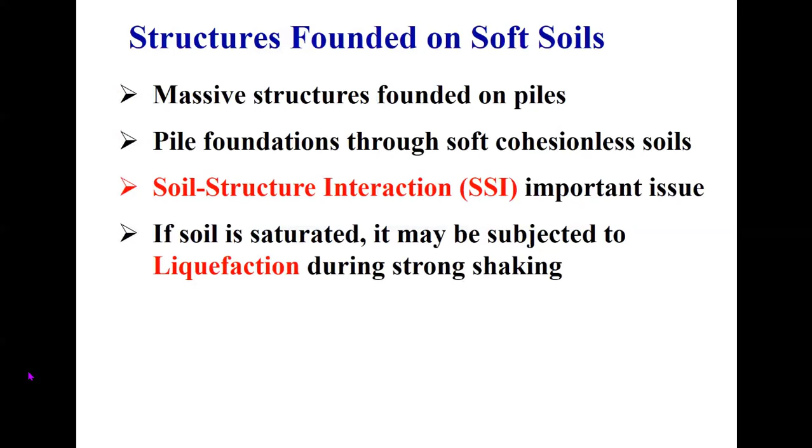So you may be already aware what is SSI, but it is most important when you deal with massive structures which are founded on piles. Pile foundation through soft cohesionless soils, when it is passing through that, when you have cohesionless soils, particularly sand, loose sand, then the chances of liquefaction are there. So in that case, we will be touching upon how to deal with the case when it is liquefiable soils.

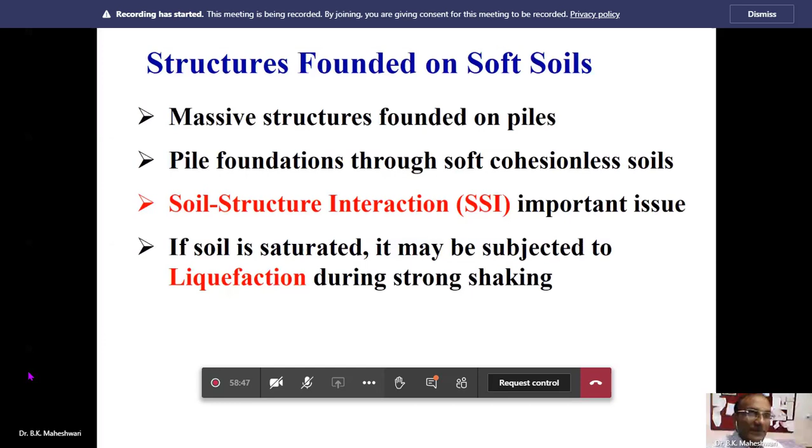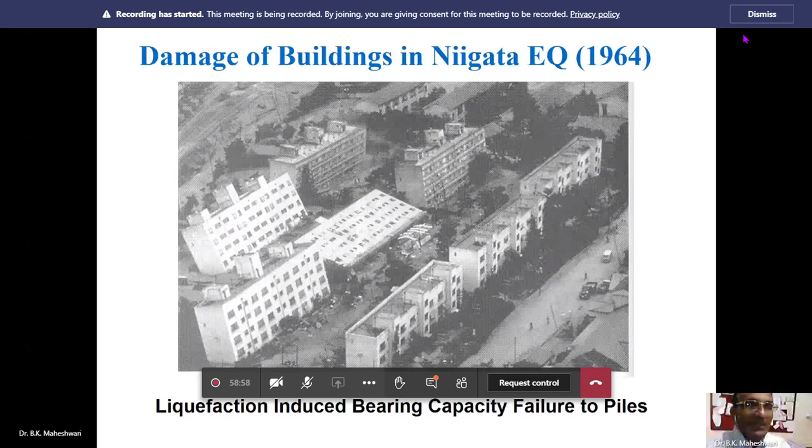SSI is an important issue. If soil is saturated, it may be subjected to liquefaction during strong shaking. There are a few slides which I have already shown to my MTech students, so they should keep some patience until I come to the next point. Last week I covered this in my MTech class also. So what are the failures during earthquakes?

Particularly, this slide is very famous. This is from the Niigata earthquake of 1964, and this is liquefaction-induced bearing capacity failure of piles. So pile foundation is very important for the earthquake condition.

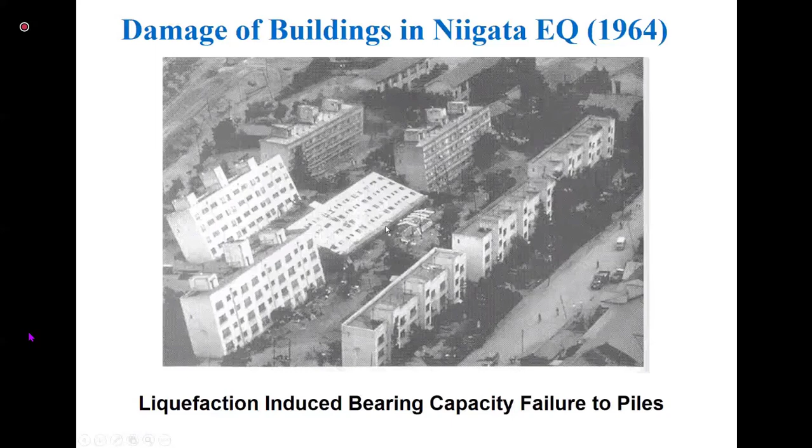Continuing with this, there are other examples of bridges that collapsed during past earthquakes. For example, this is the 1995 Kobe earthquake, and this damage is from the 1964 Niigata earthquake. You could see that the deck of the bridge has been damaged, and this is basically related to what we call foundation failure. Once the foundation fails, the superstructure is not going to survive, so it is equally important that we keep the foundation intact during earthquakes.

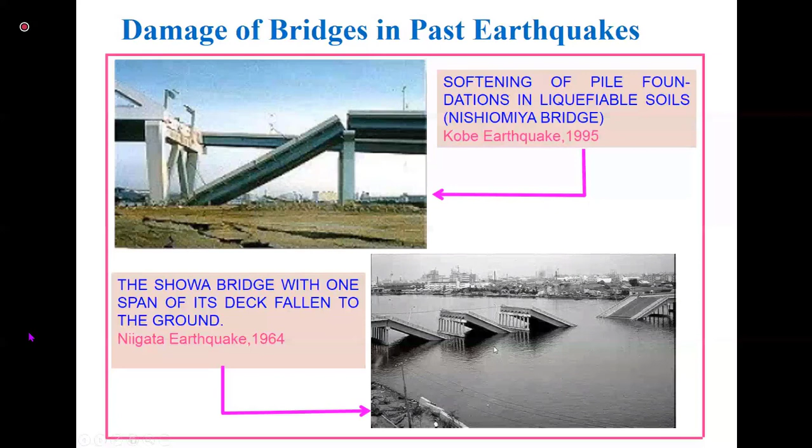Continuing with this, this is again from Japan, the 1995 Kobe earthquake. There was damage to the Hanshin Expressway. What you could see is damage to the piers - these piers got damaged, but there was hardly any damage to the superstructure. If you look at the next figure, you could also clearly see similar kind of damage. So these are all issues related to foundation.

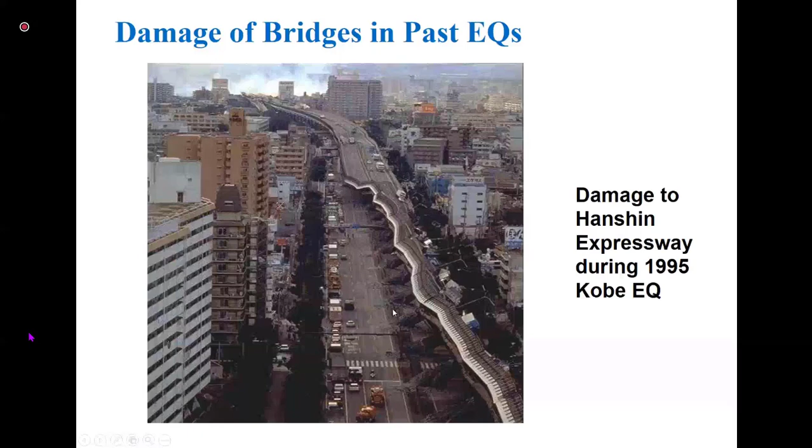These are related to either soil amplification, which is one of the first steps of SSI, or maybe liquefaction. This is another example from the 1995 Kobe earthquake, where you can see damage to piers and the reinforcement is visible. Such kind of damage clearly indicates that the foundation is very important during earthquakes.

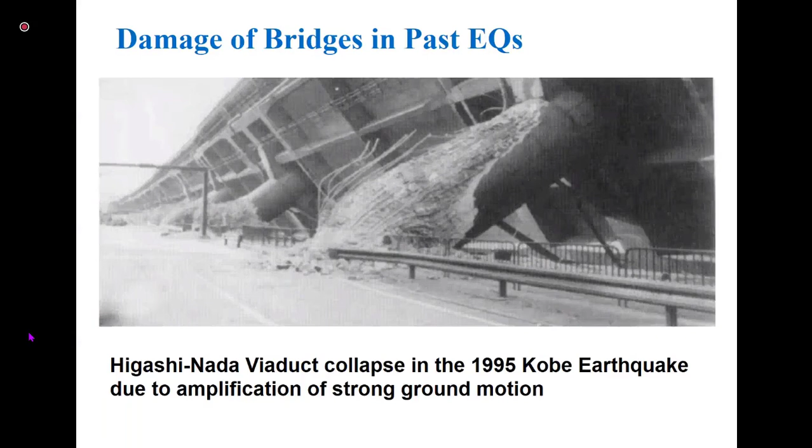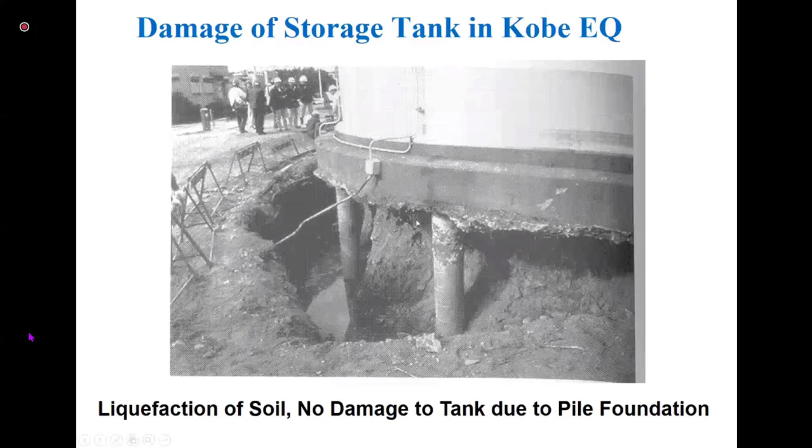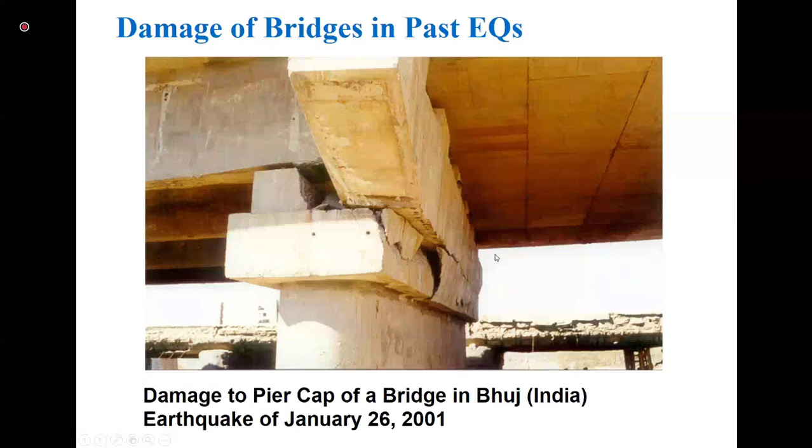Continuing with this, you have damage to a bridge in past earthquakes related to this earthquake. What you could see is that below this deck, the pier cap has got damaged, and below there is some damage to the pier. These are all related to soil amplification, which is the first step of SSI, and will be discussed later. So they clearly indicate that in past earthquakes there is clear evidence of damage related to SSI.

Excuse me, sir. Yes, please go ahead. Sorry to interrupt you, sir.

I'll speak slowly. So what you could have in this case is a pile foundation, which is passing through the liquefiable zone. There are three layers - two layers are non-liquefiable zones, and there is a layer called the liquefied zone in between. The problem occurs at the junction of the non-liquefied and liquefiable zones - these piles will be subjected to severe stress at the junction of the liquefiable and non-liquefiable zones.

To overcome this problem, when we design the pile foundation, we need to account for this liquefiable zone. This can be accounted for by assuming that there is no support from the soil in this zone when we design the piles - assuming that the pile is free, it should be designed that way. Such kind of issues arise, and we are going to discuss them in detail in the later slides.

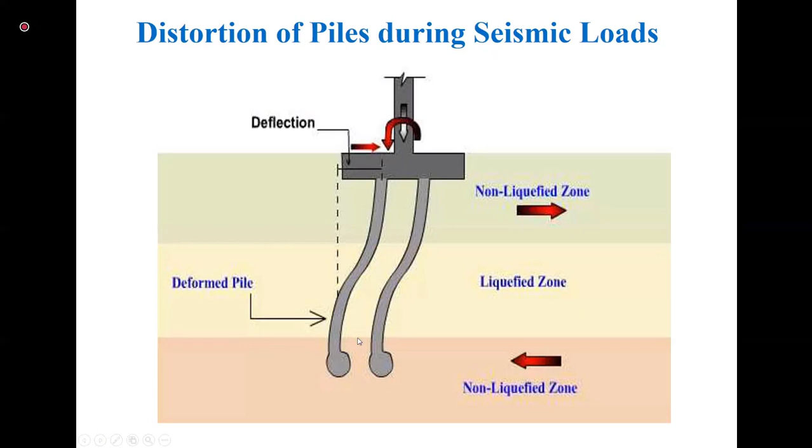So now coming back, after showing you so many slides related to damage and other things, before I talk about advances in SSI, I would briefly like to touch upon the basics of SSI, which has also been covered last week during my class for MTech students - it will be a review for them.

So the most important issue is SSI, which I'm going to explain in the next 2-3 minutes, that is the objective of SSI and why SSI is important.

Okay, thank you. Objective of SSI. So before that, let's see what are the major issues in SSI, and then we'll come to this. There are 4 major issues in SSI which need to be taken care of.

So the first thing is modeling of unbounded domain. Soil, Mother Earth, is infinite, and we need to model the unbounded domain in such a way that we are able to satisfy the radiation conditions. Satisfying the radiation conditions, we need to model the unbounded domain, and this is the most fundamental objective of SSI.

Modeling of soil should be done because the properties of the soil are frequency dependent. That is the difference between soil and other materials. And when we talk about soil-structure interaction, you need to consider the soil fully.

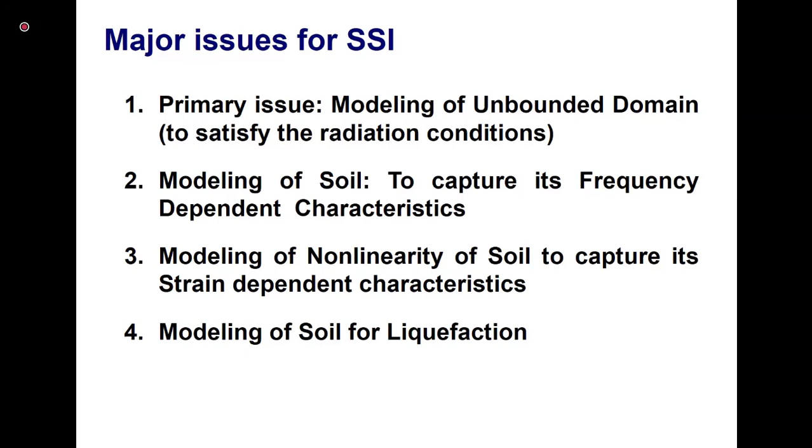It will be a very complex problem, and I will confuse you how to deal with it. But we will discuss the first one. Let's continue with this slide, which will explain it to you.

I think this is my pet slide. I have used it in many lectures on SSI. So those who have already seen it, pardon me. But this is the fundamental slide which perhaps I cannot skip.

So to explain the concept of SSI, what you have is a structure, and when we say structure, the foundation is also part of the structure here, because for the foundation all the dimensions are known, material properties are known. So you assume that the structure includes its foundation, and when this structure is subject to seismic loading, which may be due to earthquake or other reasons, it gets vibrated.

In reality, boundaries and artificial boundaries were not there. In fact, we are putting them to analyze the real scenario. Rather, you have Mother Earth.

Naturally, for any— yes, please. Sir, your voice is barely audible. Oh sorry, then I don't know, is it a network issue at my end? Now your end? Sir, it's clear, but you have to keep your microphone really close. Now it's perfectly audible and loud, sir. All right, and I'll speak a little slowly also, so you can understand it. All right, sorry about that.

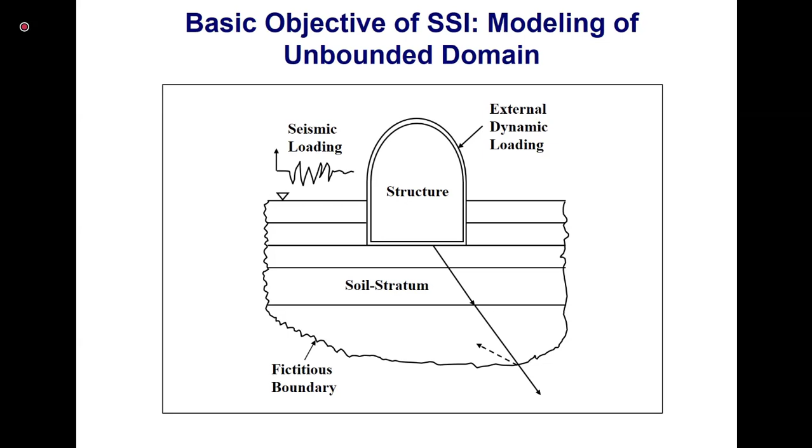So the fundamental objective of SSI is to model this unbounded domain in such a way that it satisfies the radiation condition. With this message, let's go ahead. Now this slide shows the importance of SSI, why SSI is important.

You can see in this slide there are two identical structures: one situated on rock and another on soil. When you have the first one situated on the rock, the arrows show vertically propagating shear waves, propagating vertically while the particle motion is horizontal, perpendicular to the direction of propagation. So when these waves come to the rock, whatever is coming from the seismograph or the bedrock, you can input exactly the same at the base of the structure.

However, when there is a soil column in between the bedrock... yes sir, yeah hello, yeah go ahead please. Yeah, am I audible?

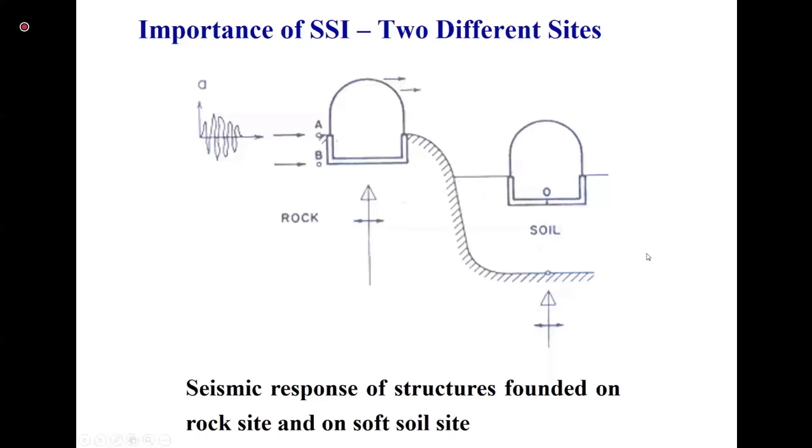Now continue with how SSI works and what are the two other effects which can be explained from this slide. Normally, earthquake motion—because we are talking about earthquake—your seismologist or seismograph gives you the motion at the bedrock level, since most of the time the seismograph is placed at the bedrock level, shown in figure B. In this figure you have incoming waves, and this is the input motion amplitude. This is the case when there is no soil column on top, the soil is absent. However, when soil is present on top of the bedrock, with no structure or foundation present, the presence of the soil still changes the incoming motion.

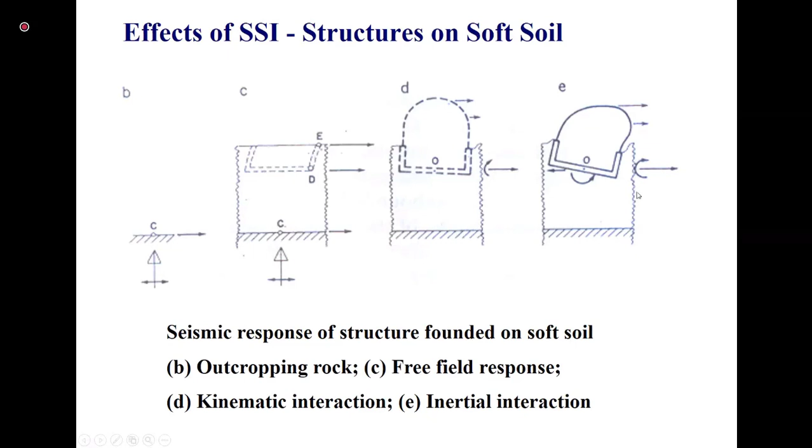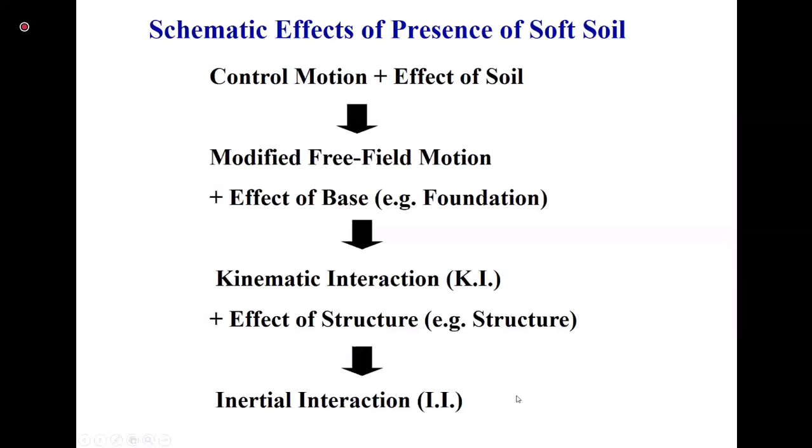What I have discussed in this slide is summarized next: the effect of presence of soft soil can be summarized like this. You have control motion, which is your input motion, and the effect of soil leads to what is called modified free field motion. The effect of the base, that is the foundation, leads to kinematic interaction, and the effect of the structure, that is inertia, leads to inertial interaction. So it consists of three components: free field motion, kinematic interaction, and inertial interaction.

Continuing with this next slide, I hope everything is fine. Yes sir, everything is fine. All right, okay, thank you.

What happens when you consider SSI in the analysis? Most of the time, the time period of the system gets increased, simply due to the flexibility of the soil. When you say you are not considering SSI, you are not considering the soil, but when you consider SSI, you consider all the properties of the soil. SSI is very important when dealing with soft soil or loose sand, soft clay. Since the soil is flexible compared to the structure, as a result its natural frequency will decrease.

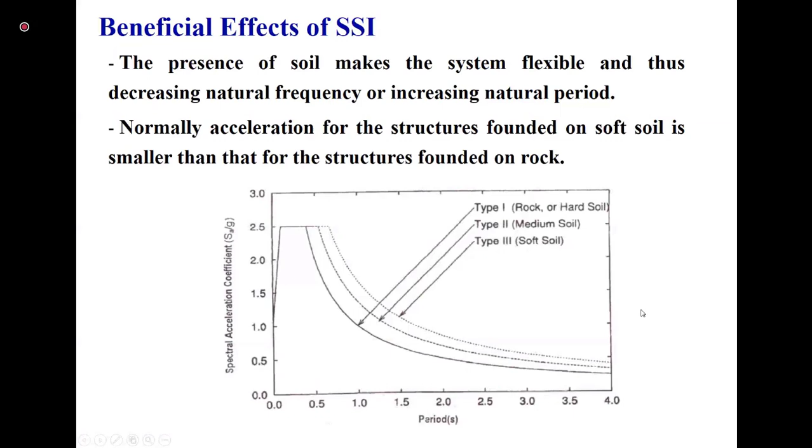Continuing with this, it has already been well documented in research papers. In general, SSI leads to smaller acceleration and stresses, and thereby smaller forces in the structure. But here you need to use the word 'in general,' not always. This is the general case, normally.

However, there are numerous documented case histories where the perceived beneficial effect of SSI has led to oversimplification in the design, leading to unsafe design in foundation and superstructure. There is a paper by Mylonakis and Gazetas in 2000, published in ASCE.

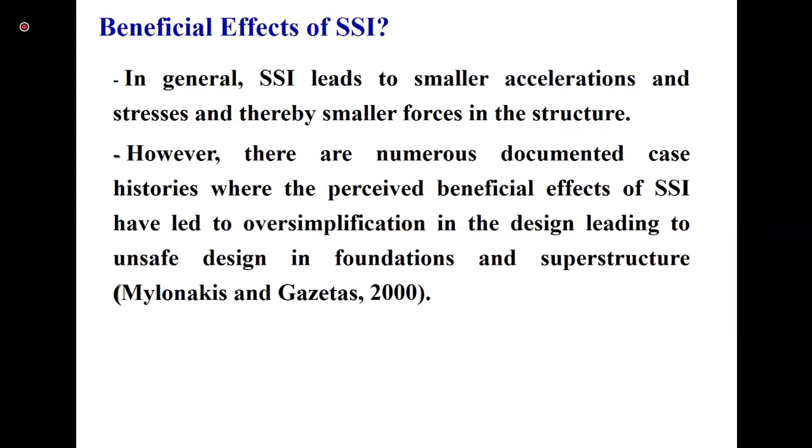Continuing with this, what I am going to explain in the next slides is a very simple method of analysis of SSI, how SSI can be considered in the analysis using a closed form solution, in simple terms rather than a very complicated case.

Before that, let me talk about the three different methods of dealing with or methods of analysis when you consider SSI in the problems. One is called continuous models based on the theory of elasticity. Then you have discrete models with lumped masses, and finally you have finite element techniques.

The first one, based on continuity and the theory of elasticity, takes into account the radiation damping of the soil, so radiation damping can be accounted for easily, and the inertial effect of the soil is also well represented. These are the advantages of the first one. However, you may not be able to consider the nonlinearity of the soil in this approach, so that is its limitation.

The second approach, based on discrete models with lumped masses, where one normally considers springs and dashpots, lets you consider the nonlinearity of the soil. However, it is difficult to consider the radiation damping and inertial effects. So the limitation of the first one is the advantage of the second, and the limitation of the second is the advantage of the first. So first and second are not complete on their own.

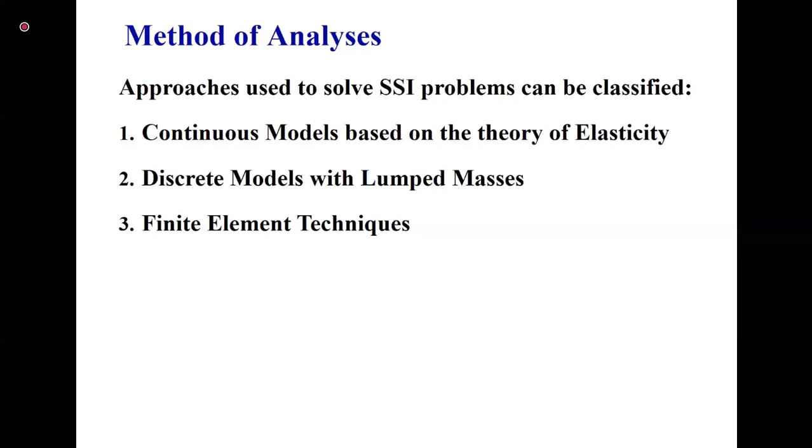So it is simple. What you have in this slide are the general steps for linear SSI analysis. Before that, let me show the next slide, and I hope the slides are visible to all of you, as well as my voice.

Yes, sir. Yes, okay, sir. Thank you. Thank you for confirming.

Thank you. So what you could see in this figure, let me acknowledge that this is from one of the papers, which is not my paper. It is from Gazetas's paper, which you will find referenced here. So this is what you have in the slide.

You have the whole system, which consists of a soil-pile system. Your foundation consists of pile foundation, and the pile foundation goes up to the bedrock - what we call end bearing piles. Then you have the pile cap, this is the pier, maybe of a bridge, and this is the lumped mass representing your structure.

When we deal with SSI, it is the soil which is more important than the structure, because for the structure you can do anything you want - nonlinear analysis, packages are available, you can go into as much detail as possible. But it is the soil which causes a lot of problems in SSI. So my focus during this lecture will be on the soil part, and the structure one can easily deal with - that is not an issue.

So in this complete problem, the seismic waves or earthquake waves are coming from some source, hitting the base at the bedrock level, and ultimately they pass through the soil and the foundation to reach the top here. So now the issue is: how to analyze this problem considering SSI in the analysis?

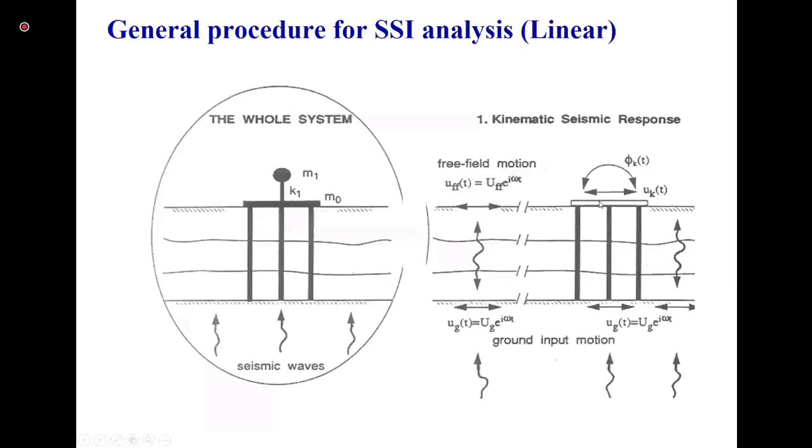Let me emphasize that your input motion is also changing. The input given at the base of this spring is not the same as at the bedrock level - this is quite different. This is the input motion found at the top of the pile cap, not at the bedrock level. In one step you find this input motion, in the second step you find the impedances, and in the third step you combine these two and do the analysis.

Now the analysis can be done in the similar fashion as we do for any type of structural analysis. Let me complete this slide and then we can talk about this. So what we discussed in the last slide can also be represented mathematically in this form, for example dynamic impedances.

In the second figure, there is a term called dynamic impedance. Dynamic impedance is the complex dynamic stiffness of the system.

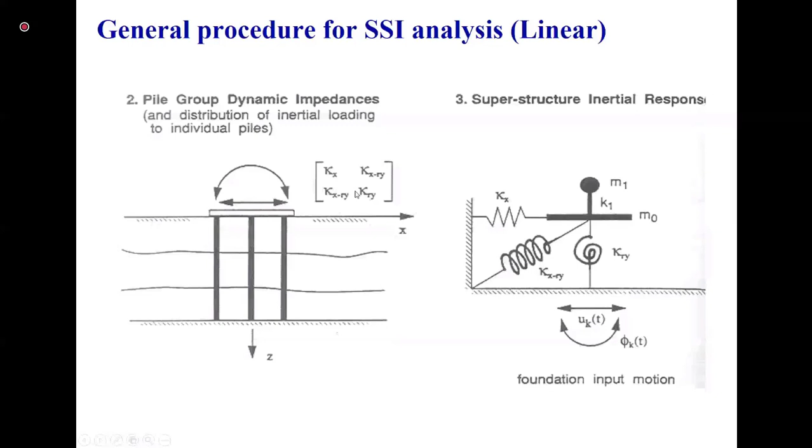Question sir, who is speaking? This is Sukumar sir. So that mass matrix, what does it include - is it mass of the pile cap and pile itself? Kumar, can we talk in the class? I think you can ask in class, no? No sir, I am not your student, I am some other one. Okay, KS Kumar is another person. Okay, go ahead please, speak.

So I have a doubt in this mass matrix and damping matrix. This mass matrix includes which component in your system?

I don't know whether I can write. Can I open a blank slide, or can I write on the blank space if organizers can help me? There is an equation of motion I can write. Can I use some pen or something here on the screen? Yeah, there is something, I could find a pen. All right, so I could find some pen and will try to write something to explain you. I don't know whether I will be able to type it. Pointer option, highlighter, laser pointer - pen is there, but whether it will allow me to write or not, I'm not sure.

Let me explain in the course - that's called equation of motion. I don't know whether you are aware about that. In dynamics, in earthquake engineering, equation of motion is very important, and that equation of motion is: m x double dot plus c x dot plus k x equal to dynamic force. So those who are working in dynamics, they may be aware about that.

And there are 3 types of forces in the equation of motion. One, you have the stiffness force, which will always be there - k multiplied by x will always be there. But you have the inertial force that will come when you have harmonic excitation, and then you differentiate, then you will get omega square. Let's say you have x equal to x naught sine omega t. Differentiate 2 times, then you get omega square, and once you differentiate 1 time, then you get i omega, and this is cancelled out.

I think without pen and paper it is difficult, otherwise I'll try if I can. What can I do - let me complete my lecture, and if time permits, then I'll try to open a blank slide and try to write the answer to the question. All right? Sure, yes sir.

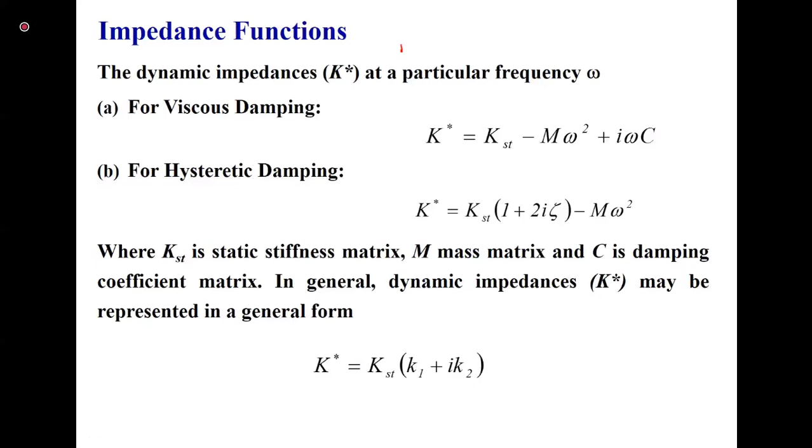Okay, so I'll continue with this because it is already 20, going to be 30, so half an hour is left. So what I have now, I am going to talk about recent advances in SSI. Significant advancement has been made in SSI studies in the last 3 decades. The advances in computer technology now make it possible to model and analyze.

Yes, is his voice coming? Yes sir, you are clearly audible, sir.

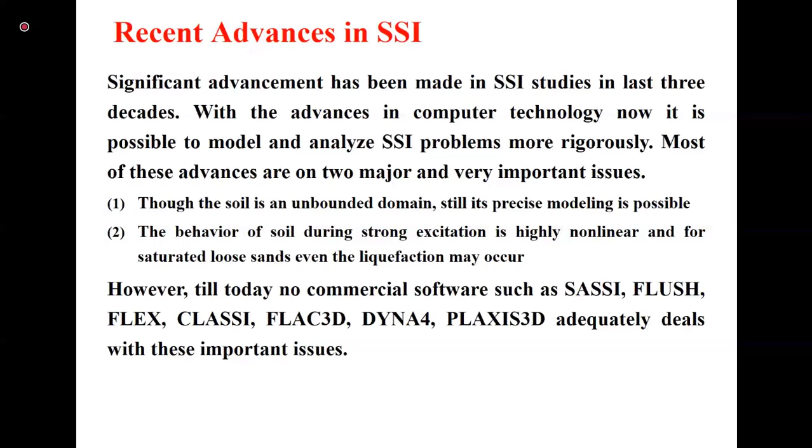So what I'm going to present in the next slides is from my own research group, including PhD students, as I mentioned earlier: Imani, Sarkar, and Saeed, who worked extensively in the area of SSI and SPSI. SSI means soil structure interaction, and SPSI means soil pile structure interaction.

My journey for SSI started in 1997 from my PhD, where I considered material and geometrical nonlinearity in the theory proposed by Kaynia and Kausel in 1982. There was a PhD thesis at MIT in the US, the first PhD worldwide on pile groups, and my contribution was to consider the material and geometrical nonlinearity in that analysis.

Some of this work has been published, and I will share it with you during the next two lectures. When we talk about boundary, as I mentioned, how to model the boundary is very important, and these boundaries are local in space and time. So what kinds of boundaries do you have? Elementary boundary, viscous boundary, Kelvin elements, transient transmitting boundary, and infinite elements.

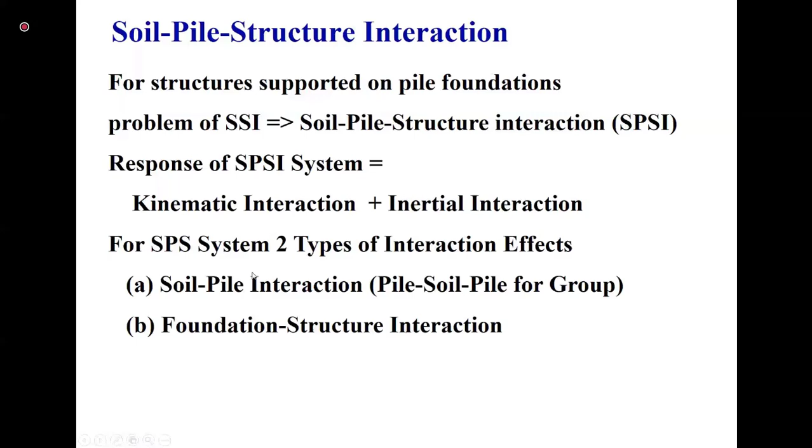Continuing with this slide, some of this data has been published in Soil Dynamics and Earthquake Engineering in 2004. As I explained, nonlinearity is a big challenge when dealing with soil, because the behavior of soil is highly nonlinear when subjected to strong shaking.

So what we did, we broke the problem into two parts. One is called the foundation system, another is called the structure system. However, this kind of separation of the system is not permissible for nonlinear analysis, and still we are able to do it. How are we able to do it?

Though we break the system into two components, continuously at each time step we keep interaction between these two components. One way is that you analyze this for the whole time history and get the answer, then analyze the other. No, this is continuous feedback from one system to another system.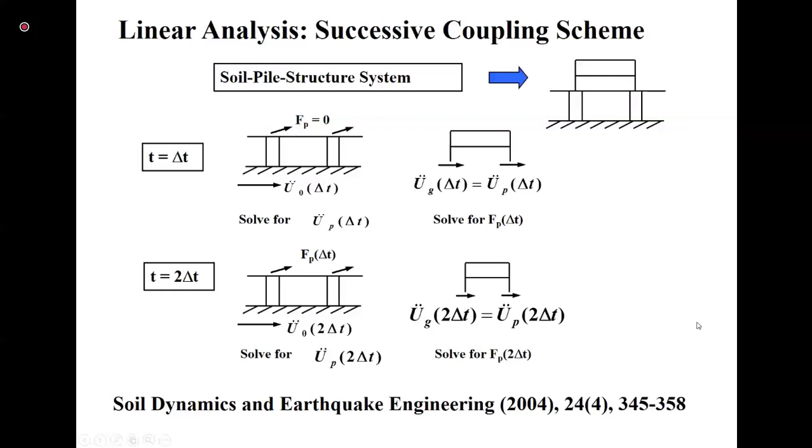Continuing with this - what has been done using this technique? We have analyzed two simple systems, which are soil pile systems. The first one consists of a single pile, and the second one is a 2 by 2 pile group, that means a square pile group of 2 by 2, with a structure on top of it having 10 meter and 6 meter heights.

Let me show you how we have done the modeling for this. Because there is complete symmetry - your structure and system is symmetrical, and your loading is also symmetrical, applied at the center in both cases - taking advantage of this symmetry, we were able to consider a 1/4 model for the single pile as well as the pile group.

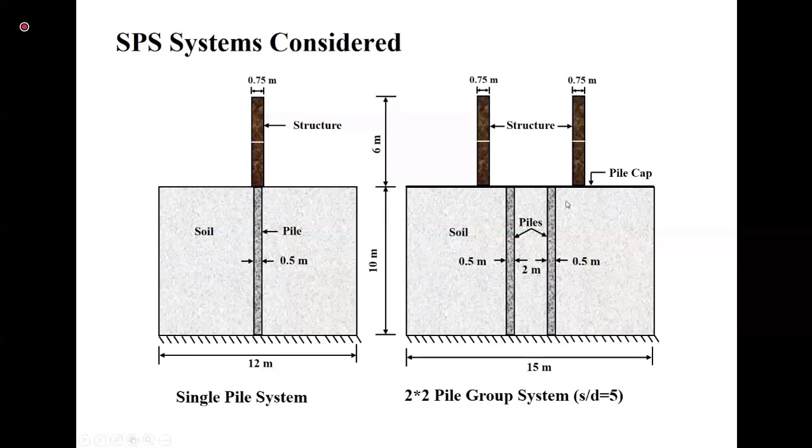This 1/4 model can work for linear analysis but not for nonlinear analysis. For nonlinear analysis you need to consider at least half of the model. So for the single pile this is the model, and for the pile group this is the model.

So what you could see, instead of a pile group there are 2 by 2, 4 piles, in one quarter model. This is called quarter model. In this 1/4 model, you need to consider only one pile, but you need to apply what is called the condition for axis of symmetry and axis of anti-symmetry.

At the same time, you need to consider the boundary. And the boundary, as I mentioned, is very important in SSI. So how is the boundary modeled in these problems? Boundary is modeled using what is called Kelvin elements, and these Kelvin elements consist of spring and dashpot. These are the boundary elements here.

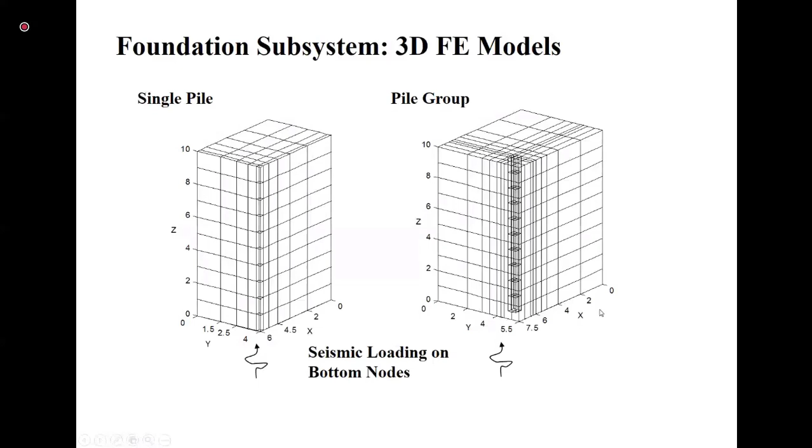However, these are the axis of symmetry, here. The translation is restricted in this direction while permitted in the X direction. While in this case, they are restricted in Y direction and permitted in X direction. So these rollers are representing the boundary, inner boundary, axis of symmetry and anti-symmetry.

At the outer boundary, you have a combination of spring and dashpot. So the one Kelvin element consists of spring and dashpot. That means you will have a spring as well as one dashpot. Dashpot means viscous dampers, or could be damper. So you have one spring, another damper. Combination of spring and damper or dashpot is called Kelvin elements.

And the Kelvin elements work better for boundary conditions. Some people use, only for simplicity, viscous dampers only, no spring. Once you use no spring at the boundary, only dampers, your problem gets very much simplified. However, this is not accurate. Using a combination of spring and dashpot is far better than only using viscous dampers.

So this has been emphasized in these papers which have been published. Another paper is published in the Canadian Geotechnical Journal in the same year, 2004. So this is the case.

I hope, am I audible, sir? Hello? Yes, sir, yes, sir. Yeah, yes, you are audible. If anything is unclear, please interrupt. Okay, thank you, so I continue with that.

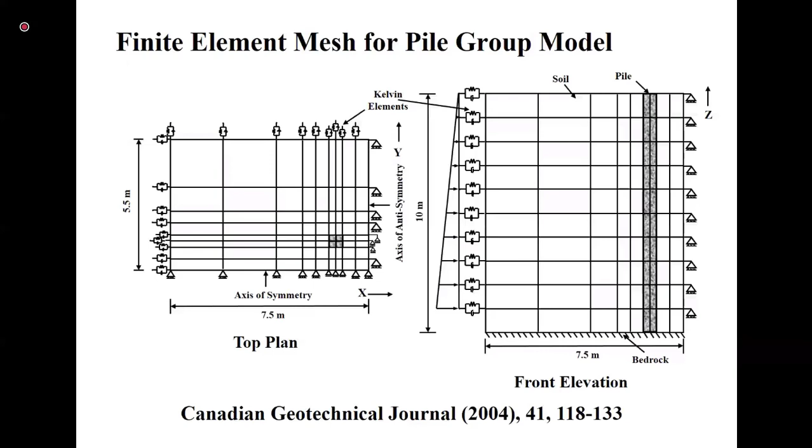So what you have now, this is the modeling part. I have shown you how we have modeled the system and how we have modeled the boundary condition. Now I am going to show you some typical results which have already been obtained and published. As I mentioned, all of my studies, and my students, have worked very systematically on SSI. Understanding is most important rather than getting the result only. So we have worked on the free field response, then the single pile, then pile group, and then soil-pile-structure interaction.

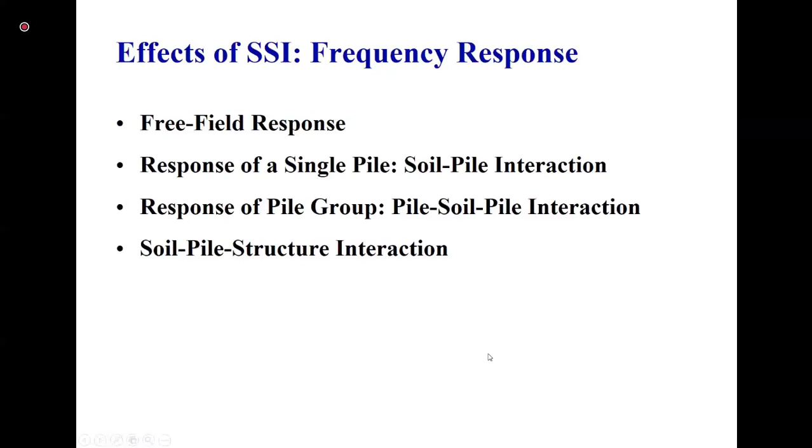So when you have the free field response, that means there is no foundation, and this is the ratio of your output at the ground level divided by the input motion. You could see that this ratio varies quite a bit with frequency, and at a certain dimensionless frequency this ratio could be more than 2. That means due to soil amplification, your input motion may be amplified more than 2 to 3 times in this case, in the given data. Of course, how much amplification it will take depends on your input soil properties as well as your geometry and other factors.

What you have in this chart, on the x-axis, is dimensionless frequency, which is typically how frequency is represented in geotechnical earthquake engineering. Here, omega is the frequency of excitation, D is diameter of pile, and Vs is shear velocity. So this number comes out dimensionless. As your omega varies, your A naught will change. So what is the variable parameter? Frequency. D and Vs are constant. So as omega changes, A naught changes.

Or otherwise, here A naught values are listed. You can find the value of omega by multiplying A naught with Vs divided by D. So this A naught is dimensionless frequency. Why do we make it dimensionless? So these parameters are applicable for a wide range, not specifically for a small range of frequency. So you could see there is an amplification wherever this ratio is more than 1. But if this ratio becomes less than 1, then there will be de-amplification, which may occur at higher frequency.

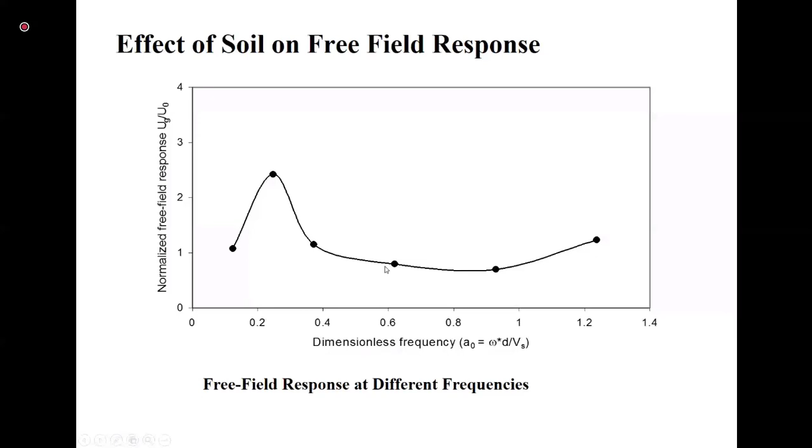Okay, continuing with this. So next is the effect of kinematic interaction, the effect of soil-pile interaction. When you insert the piles inside the system, this is the ratio of the amplitude at the pile cap divided by the amplitude at the ground level, and how this ratio varies with frequency. You could see that this varies with frequency, and you get the maximum transfer function at a certain frequency, which is basically related to the natural frequency of the system, because the response is maximum at the time of natural frequency.

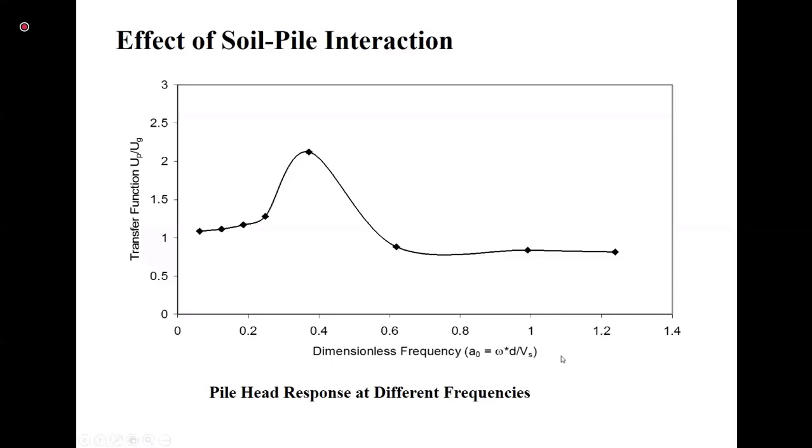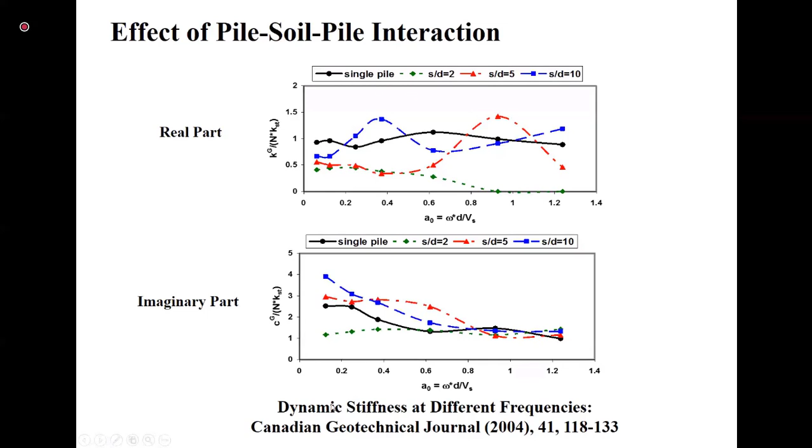Now let's see the effect of structure. So far you have only considered the pile foundation - soil and foundation only. Now I put some structure on top of the foundation. This structure will also make its effect, and that is called the inertial effect. When you consider the structure on top, the difference comes in your results - this is about the effect of successive coupling on the response of the pile.

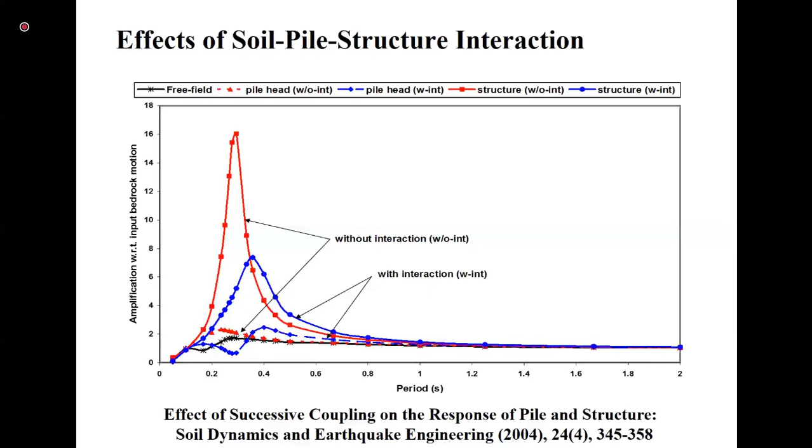Now what I am going to talk about is the recent work which has been done.

One of my PhD students, Madni Saeed, published in 2014. He has already graduated. The title of his PhD was Nonlinear Seismic Soil Structure Interaction using Scale Boundary Finite Element Method. So I will share some of the slides and results already published in the paper.

This slide explains the difference between direct method and substructure method in SSI analysis. In the direct method, you consider some part of the soil together with the structure, and as a result you can analyze them together. However, with the substructure method, you put some boundaries instead.

ROI stands for region of interest, which is the region near the structure where the behavior of the soil is known. In the direct method, this is the part where the effect of the structure comes in, and the behavior of the soil is nonlinear. However, when you go away from the structure...

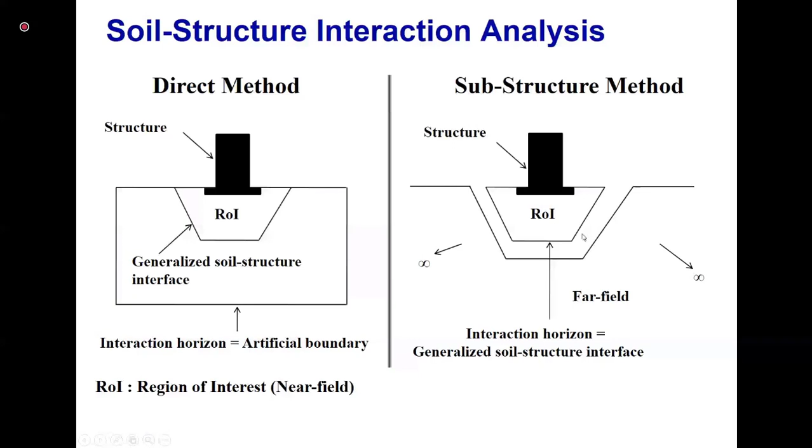So to deal with this problem, what Madni Saeed did was put a boundary here and model it using the scaled boundary finite element method, SBFEM. I'm going to talk about that a little bit later.

In soil structure interaction analysis, let me go again through direct method and substructure method. There are two columns on the screen showing different types of boundaries used for each. For direct method you have the classical viscous boundary, infinite elements, frequency dependent Kelvin elements which I have already shown results for, and other transmitting boundaries. For substructure method, we use what I have listed here.

Boundary element method, that is BEM.

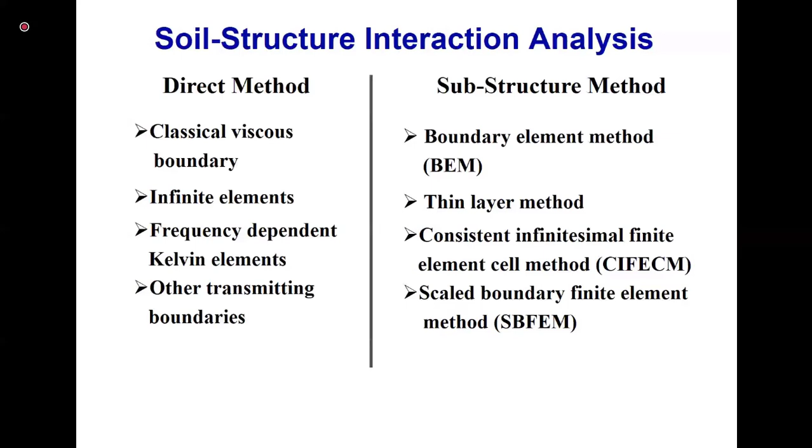So what is this concept of SBFEM? What has been done is explained by this graphical picture, visible to all of you, and in the next minute I am going to explain it. When we deal with soil structure interaction analysis, two major issues arise. First, how to deal with the unbounded domain—soil is an unbounded domain, not finite, it is very large.

Second, the behavior of the soil is nonlinear during earthquakes. So what do we require? A perfect boundary which represents the unbounded domain, and at the same time, a constitutive model able to deal with the nonlinearity of the soil. To overcome this problem, Madni divided the domain into two components: near field and far field. The far field is modeled using SBFEM, the scale boundary finite element method, and the near field is dealt with using the normal finite element method.

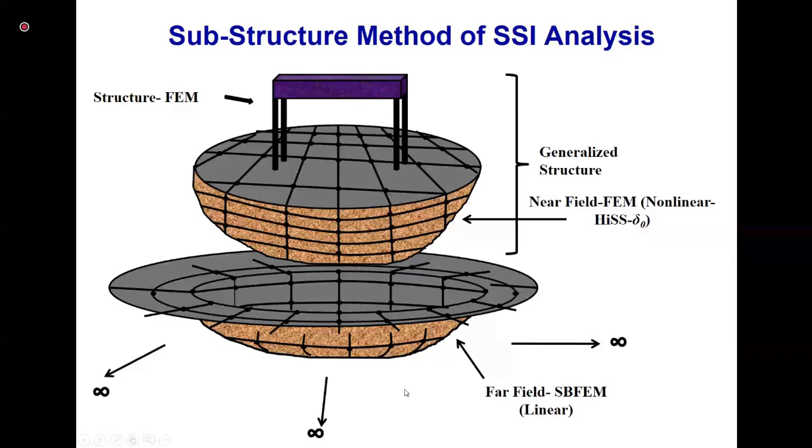The second part deals with using SBFEM. Now, what is SBFEM? I'm going to discuss in the next few slides what SBFEM is and its advantages, and then we'll come back.

Scale Boundary Finite Element Method. There is a book by Wolf on SBFEM also, so those who are interested can look it up. SBFEM is not a new topic; it's already available, but its application for SSI is really new, done for the first time, I think, by Saeed.

So what has been done? It's entirely based on finite elements, but with discretization on the boundary only, so we need to discretize only on the boundary. It offers more than the combination of the advantages of both FEM and BEM, evading their drawbacks. It permits calculation of the dynamic stiffness matrix in the frequency domain as well as the unit impulse response matrix in the time domain.

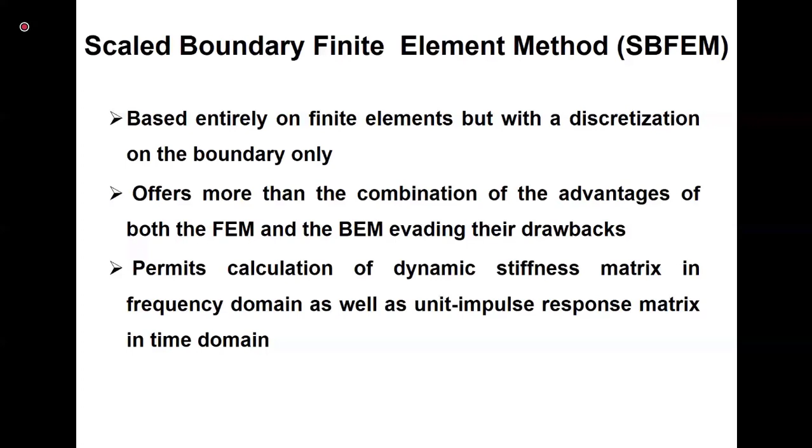So what are the advantages of SBFEM? This is a comparison of SBFEM with BEM and FEM. Let me explain: BEM stands for Boundary Element Method, FEM is the very popular Finite Element Method, and then you have SBFEM.

You can say SBFEM is nothing but a combination of BEM and FEM, and in SBFEM, the advantages of both BEM and FEM are taken. For example, no fundamental solution is required in FEM, but it is required in BEM. But in SBFEM, you don't need any fundamental solution.

Reduction of spatial dimension by 1 is possible in BEM, not in FEM, but it is possible in SBFEM. Radiation condition is satisfied exactly in BEM, not in FEM, but again SBFEM also gives this. FEM is suitable for anisotropic materials, not BEM, but SBFEM does it. Symmetric matrices are possible in SBFEM, though possible with some condition in BEM. Free surface extending to infinity is not discretized in either BEM or FEM, but it is possible in SBFEM.

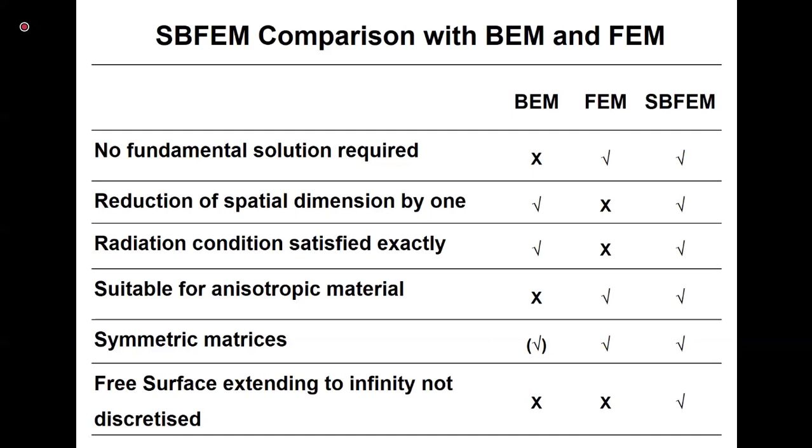So with this table, you could see that SBFEM is so good that whatever disadvantages you have in both BEM and FEM, they can be overcome in SBFEM. Then continuing with this, you have verification of the coupled approach.

So there are some verification and other things. I think I still have some time. Hello, yes sir, 5 minutes from the designated time is still remaining, sir. You can carry on, okay.

So some work has been published in Computers and Geotechnics. This is the problem: you have a box where some horizontal forces are applied to represent the impulse loading at this level.

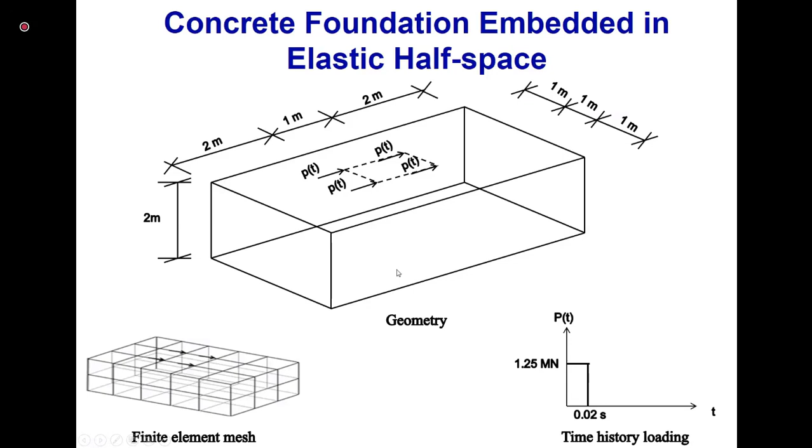This is the loading given here, representing lateral motion for earthquake, horizontal motion. In this result, there is a comparison between the present study, done by Saeed in 2014, and Lehmann and Schanz, and you could see very close form solutions. This has been done using our own code, no software has been used; it's a MATLAB program, and you can see the agreement is very good.

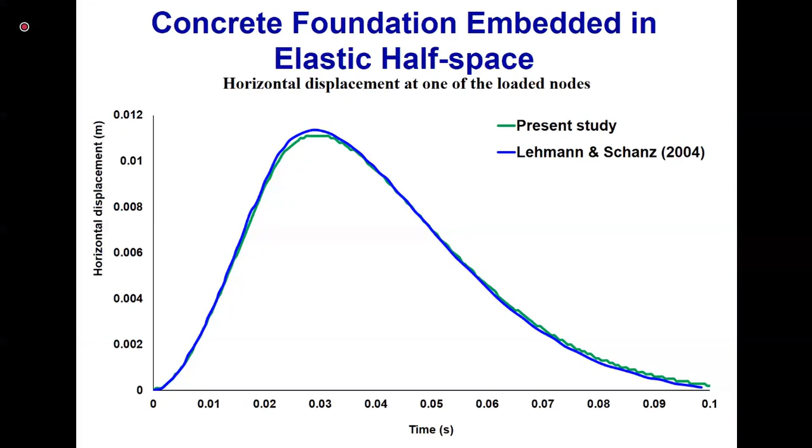Later on, what improvement has been done? This was the first verification that whatever we were using is correct. Then, a technique was developed with a reduced set of base functions, and you could see that up to this point all 4 results are the same; however, after that they start deviating.

This is with the full set of base functions, so this is the exact result. But if you use a 20% reduced set of base functions, you get this result, 40% gives this, and 60% gives this. So when you reduce computation time, there is a small change in accuracy, but there is a lot of reduction in computation time.

The reduction is listed here: this table gives the reduced set of base functions, showing the exact result for horizontal displacement. With 20% reduction, this is the result; with 60%, this is the result, giving a percentage error of 3.54%. You may be aware that in engineering, if your error is less than 5%, that is acceptable for most work if it simplifies your calculation and process.

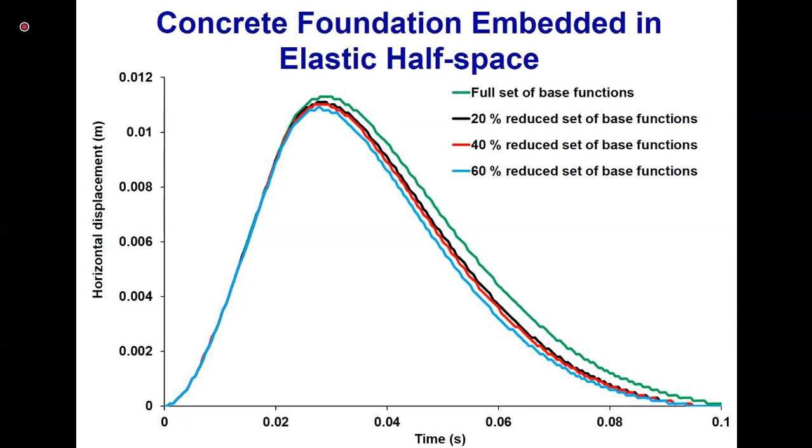So up to 10% is normally considered acceptable, but 5% is not an issue. So it is even less than 4%. And with this 60% reduction of base function, what was the reduction in time of computation which is listed here?

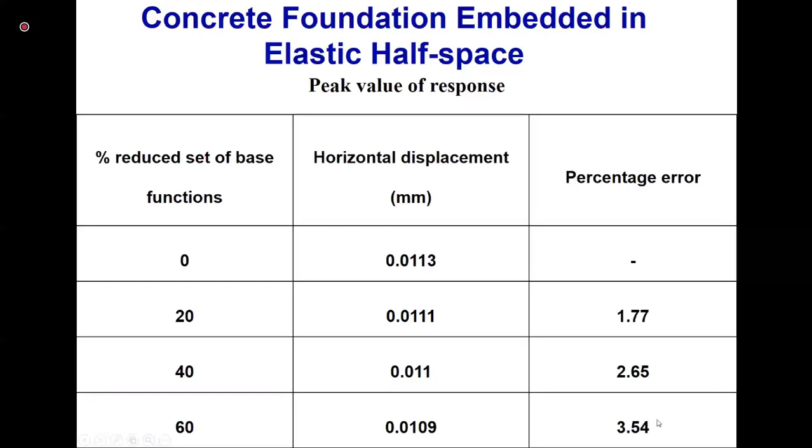So the message here is that even with a reduction in accuracy of 4% from the exact result, the reduction in computation time is more than 50 times. Almost it is taking about 50 seconds against 2500 seconds.

Continuing with this, another work on dynamic impedance and response using different approaches, published in the International Journal of Geomechanics, ASCE, in 2016. These are the comparisons for a single pile.

This is for verification purpose only, to show that our technique is working well. You could see the closed form solution, this is Emani and Maheshwari, and we have compared all three results. This result is Sarkar, and this is the present study, meaning by Saeed. So again, all three students' works are compared here, and you could see good agreement.

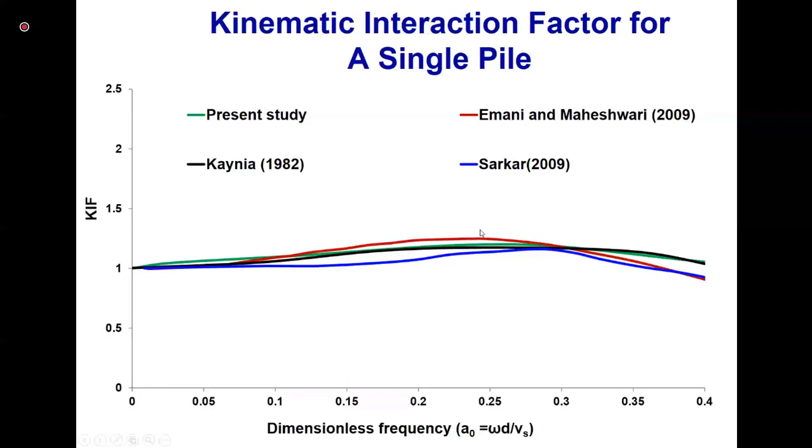So this verified our technique for the present study, and then what we started working on, which is again published in the same journal, Computers and Geotechnics, is the boundary effect. I'll explain this in, I think, another 5-7 minutes.

Is it all right? Yes, sir. Not at all a problem, sir.

Okay, all right. So I'm going to explain in the next few slides how we can deal with the boundary. You see that what is typically done in SSI problems, you consider a certain domain given here, and in this domain you apply some boundary. Where do you apply this boundary? You apply this boundary here. So the popular boundary is the viscous dashpot, which is very easy and simple.

I used viscous dashpots long back, 25 years ago, when computers were very slow, in '94, '95, during my PhD, so we used viscous dashpots. But nowadays if I use viscous dashpot, perhaps the papers will not get published, and people will say it is quite well known, everyone knows about it. But they are very simple to use, so at an elementary level they are fine. Practicing engineers still use viscous dashpots and other methods.

So what I am going to show you is this: the width of the foundation is 5 meters. What is B? B is the distance considered away from the foundation on both sides. Naturally, the more you consider B outside, the more accurate your results are going to be. Your radiation condition is going to be satisfied even with viscous dampers, however your computation time is going to increase. So one way you solve your problem is getting a good result, but at the cost of very high computation. For that, here we have Young's modulus, density, and Poisson's ratio given.

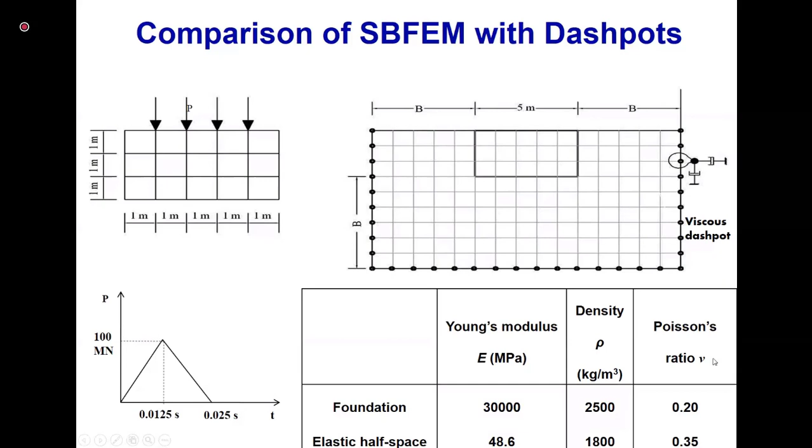In the next slide, you could see the difference in accuracy when you consider different boundaries. The top result is using SBFEM, scaled boundary finite element method. Then you have dashpots placed at 5 meters, 10 meters, 15 meters, and 30 meters. So when you put the boundary at B equal to 30 meters, you get close to the exact result, however computation time also increases.

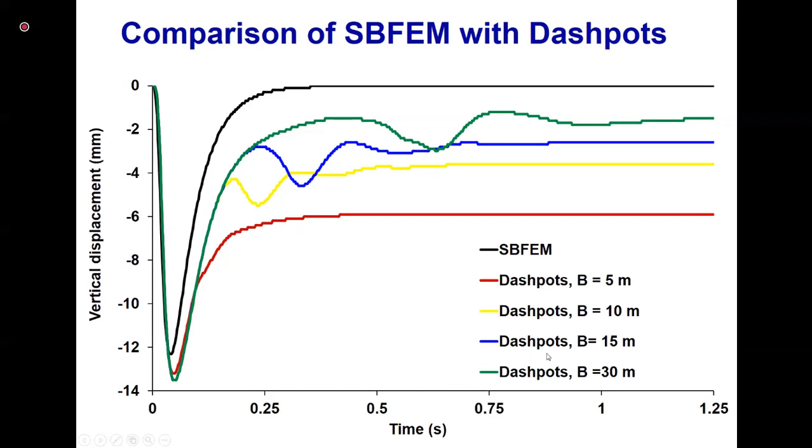So in this paper, which is published in Computers and Geotechnics, we have shown that our boundary was working well as it helps to reduce the computation time.

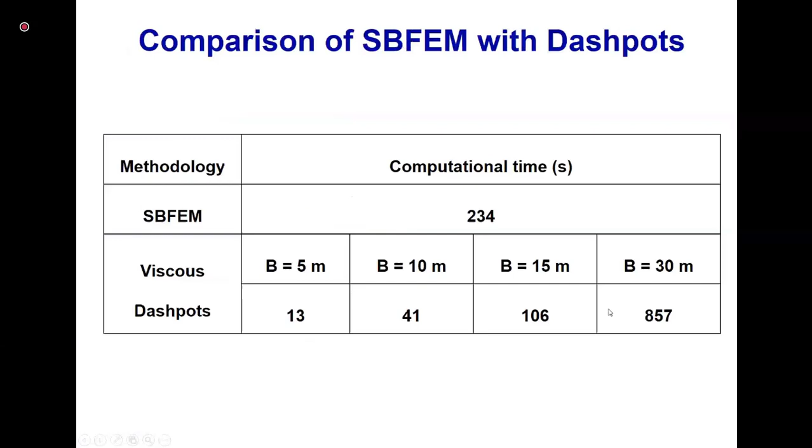So this was the message there, and so continue with this. I think I have done almost with all topics. What I am going to discuss very briefly in next 2 minutes is that there are different approaches for dealing with material nonlinearity and liquefaction.

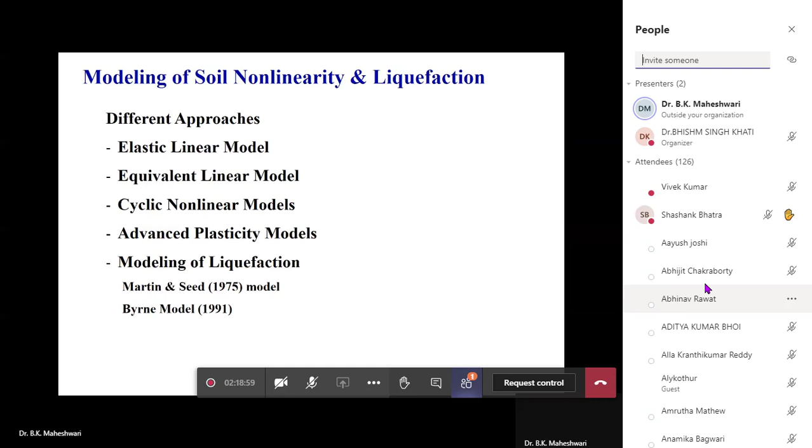For modeling of liquefaction, suppose you want to deal with liquefaction along with SSI, there is a paper published by Martin and Seed in 1975. It says how to model pore water pressure. Then the Byrne model is there, published in 1991. And different constitutive models are there.

Elastic linear model is simple. Equivalent linear model is given in Kramer's book. I think many of the audience may be aware of Kramer's book. Cyclic nonlinear model is also available.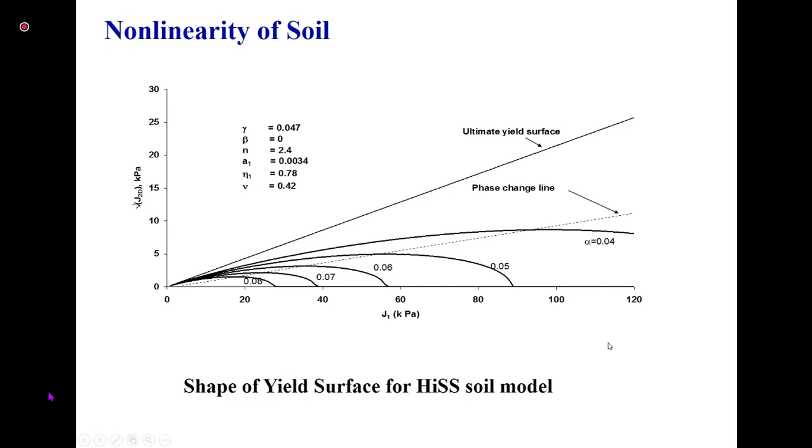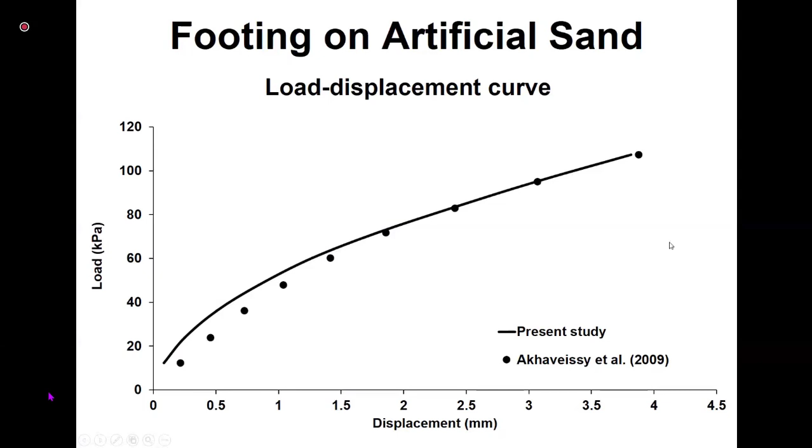Using this model, which is very complicated, we are able to deal with and show a problem - a footing on artificial sand. This problem was taken from literature, and using our model, we are able to get the result, and you could see that the results are in very close agreement. These are already published in Geotechnique, and one can refer to those papers.

Now the issue is this: many times I have said that soil is a nonlinear material. Its behavior is nonlinear during strong excitation or earthquake shaking. So you require to find the properties of the soil, the nonlinear parameters, through lab tests.

And fortunately, in our Department of Earthquake Engineering, we have two systems. One is called the cyclic triaxial system apparatus, which is fully computerized, and this is able to deal with the high strain range. So in the high strain range, we can find the dynamic soil properties of the soil as well as liquefaction for analysis.

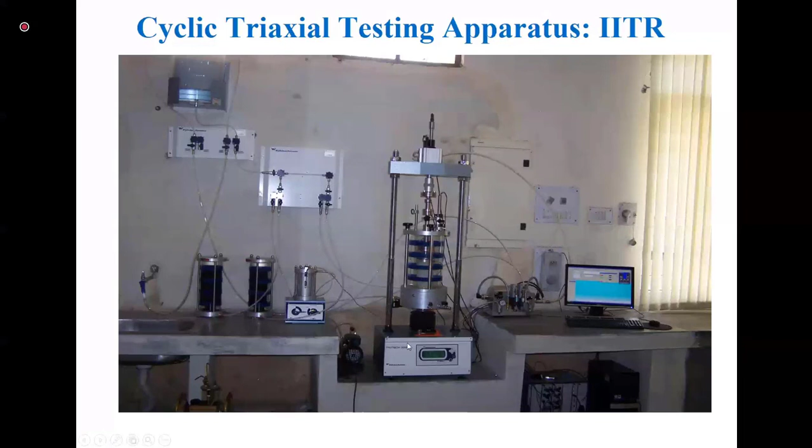And for low strain, we have another equipment called the resonant column test apparatus. So using both apparatus, we can find the dynamic soil properties in all the strain ranges, low strain as well as high strain. So these parameters can be found from lab testing, and they can be used in the computation which I have shown to you.

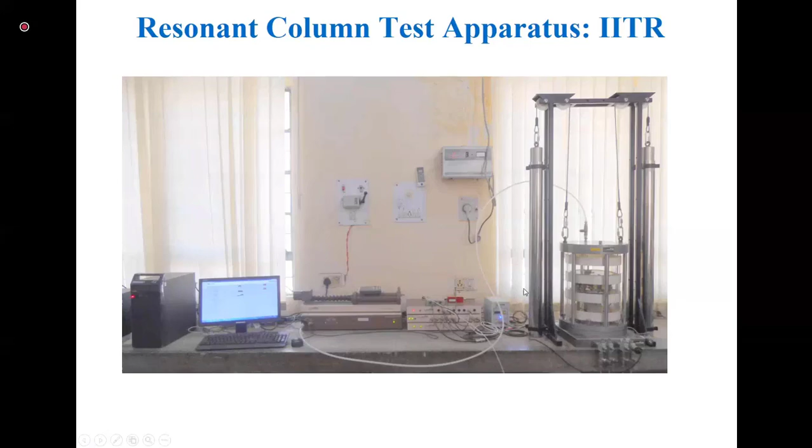So with this, the last slide - I want to give a message to you that SSI is a very important issue to be considered in the design of structures. If you ignore this effect, it may not only lead to unsafe design, but it may be uneconomical also. It is not necessary that when you consider SSI, your design is going to be uneconomical. Rather, it may be economical.

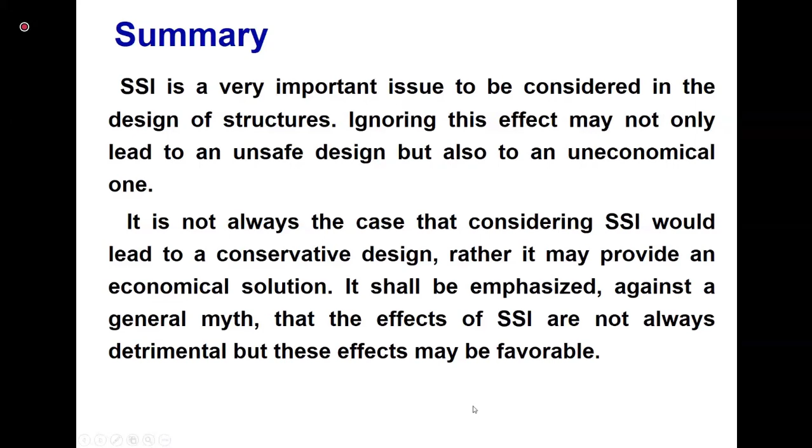However, it is not always the case that considering SSI would lead to a conservative design. Rather, it may provide an economical solution. Therefore, it is against the general notion. The effects of SSI are not always detrimental, but these effects may be favorable also. So the message here is simple: one needs to consider SSI wherever it is required.

Whatever issues have been discussed during these lectures - modeling of unbounded domain, frequency dependent characteristics of soil, modeling of the nonlinearity of the soil, modeling of liquefaction - these are the vital issues in SSI. For these issues, for all important projects, both simplified and rigorous modeling should be performed. Differences in the output should be compared, and there is no unique approach for modeling and solution. It depends on your problem, how much you want to invest in your modeling, computation, and other things. That also depends on the importance of the project.